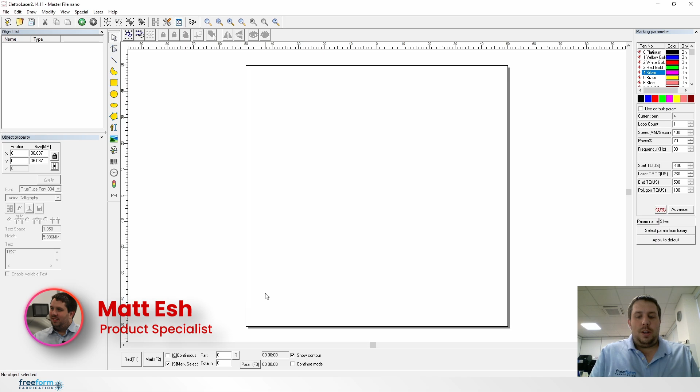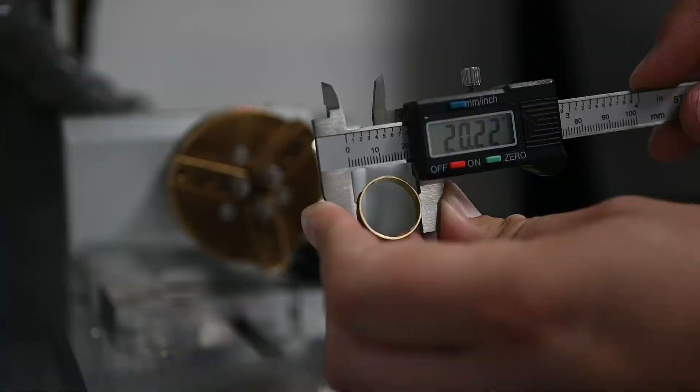Here to do another laser engraving tutorial, and today we're going to engrave some text on this ring. So the first step is to measure the ring. So to start, we're going to do the outside of this ring. So we get that measurement, 20.22 in this case. Once we've got that measurement, we can then measure the width of the band as well. It's 4.77.

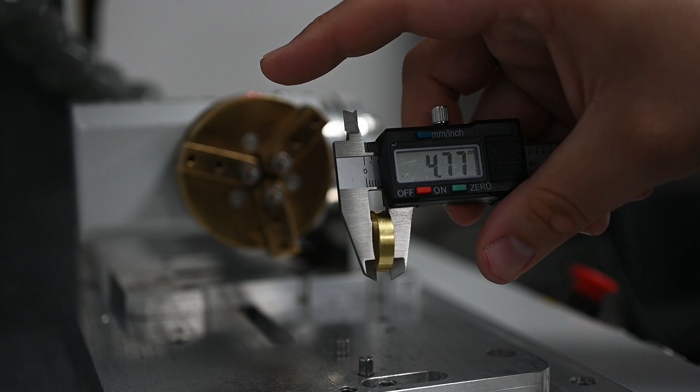So once we've done that, we can go into the laser and ring text mark menu. So the first thing, you'll see a few settings. There's not many you need to worry about. The main ones are ring inside, ring diameter and ring height. The length will not change anything at all. The angle won't change anything. You can leave all of these parts as they are, other than the ring diameter, ring height and ring inside.

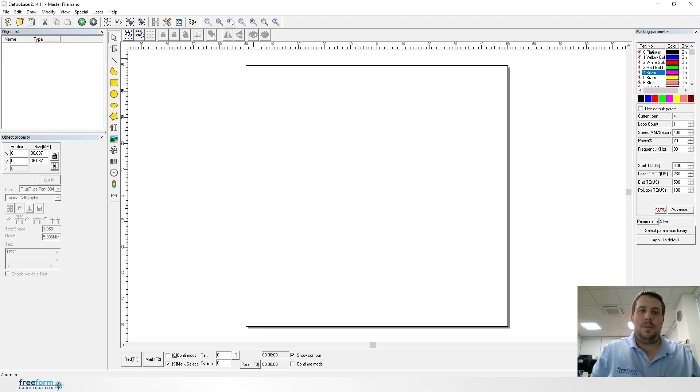So firstly, we're starting with the outside. So we untick that because we don't want it to rotate as if it's the inside. We click on ring diameter, and that's where we put in the diameter, 20.22, and the ring height was 4.77. So once we've done that, we quit out of this menu, and if you zoom in and out on your mouse or use this icon, you can see the box changes, and that now matches the outside of the ring we're engraving on.

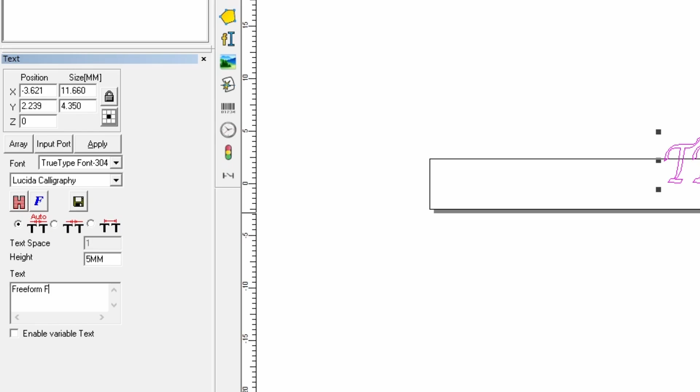So once we've done that, we can then format our text really easily to fit this ring. Just in the bottom left here, you can see where to type in. You can choose your font and everything, as in the video that we've done on text. So let's type in Freeform Fabrication. And now we can see, once we've pressed C to center it in the workspace, it's a bit too big for the ring that we're working on.

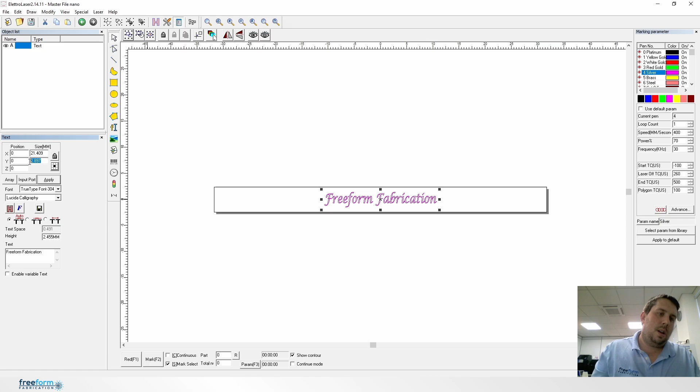So that's when we'll just drag and drop. Of course, you can measure it. We could drag and drop to the right size like this, or if you know the size that you want the engraving to be, you can change the size on here. I personally prefer just to drag and drop and make it the size I'm looking for. So once we've done that, we can hatch it.

So the settings can be the same as any other type of engraving. It doesn't need to be really any deeper unless you're going to really heavily polish it. But that is all covered in the hatching video. Just make sure that hatch 1 and hatch 2 match, so that the cleaning cycle is perfectly following the engraving passes. So again, once we've done that, we've hatched it.

Now we go back into that menu we were in before, the laser and then ring text mark, and just double check those settings again. Ring inside isn't selected, ring diameter is 20.22, ring height is 4.77. That's exactly as it was before. Now we can load this ring on the rotary device.

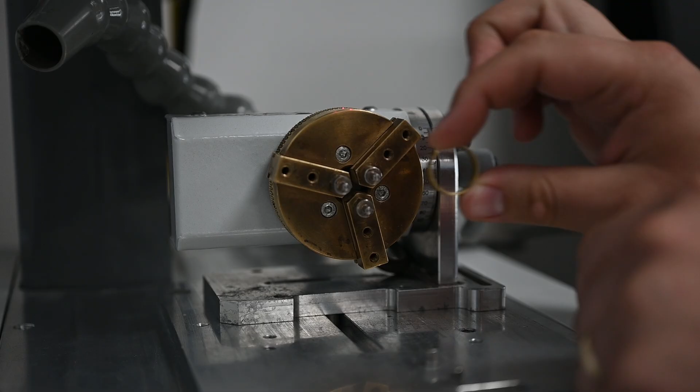So to do the outside of the ring, we put the pins on the inside and then bring those out until it's tight. It doesn't need to be really tight. We don't want to make this slip by doing it so tight, but just tight enough that the ring's not going to move at all.

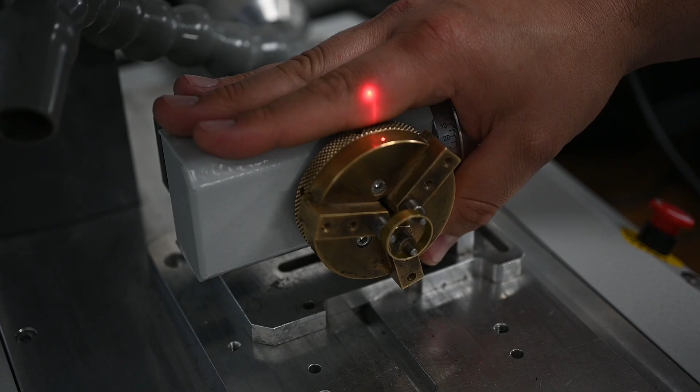Now we want to get the laser in focus on the top of this ring. So you can see the two dots here. We just want to move the rotary back until one of those dots is on the ring. Once we've done that, we can adjust that focus. It's perfect anyway, but we'll take it out, and you see the two dots. We want them to be perfectly over the top of each other. So that's when we adjust that focus until it's spot on.

If you've been engraving a flat object, you might have to adjust it quite a lot. If you've been engraving the inside of a ring, you'll have to adjust it again. Every ring is slightly different, so it's always worth just coming in, checking the focus, moving it out and moving it back in, just to 100% make sure it's in the right place.

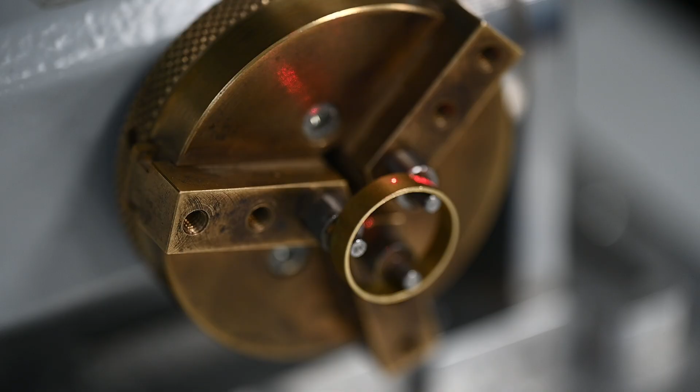So once you've got the ring in focus and you've got the ring on the rotary device, you can now preview, and you do that using this red F1. You need to do that within the ring text mark menu. If you do it outside of the ring text mark menu, you'll get a block. It'll try and engrave it as a flat object. So that's why you really need to make sure you're doing it within the ring text mark menu.

So when you preview within this, you can preview each letter individually. So you get your first letter on there, and that's when you can just make sure that the font is in the right place. So make sure that that F is bang in the center of that ring. In this case, an F anyway, of course. Then you can preview each letter individually. Obviously, freeform fabrication is quite a long thing to engrave, but it's just by doing that you can make sure it's staying in the center of the engraving the whole way around.

Once you've done that and you're happy with the position, you know it's all good, that's when you can press mark and you're good to go. So again, double check the focus. You can move the pipe as close as you can. You're not going to collect loads of dust using the vacuum pipe on a ring engraving, but you will get the fumes at least. So when it engraves, it'll do one letter at a time. It'll engrave the whole depth on each letter as you go.

So now, once you've done that engraving, you can test to see if it's deep enough. So just have a feel. Might be hot. Rings will always be hotter than flat objects. Just go, that's not really deep enough. If you start it again, it'll engrave in exactly the same place with the same amount of passes. Just keep going and doing that until you feel it's deep enough for you.

When you're first starting out, just do less passes, and then you'll get a feeling for how deep you want it to be. So just do 2 passes at a time, say, and then you'll get a rough idea of how many passes you want to do. Especially after you've polished it, you'll see how deep it is. So we've engraved the outside of this ring. It's looking great. It's nice and deep. We're really happy with it.

What we can now do is engrave the inside of the ring. So we can measure the inside here. So we're going to engrave the inside of the same ring, but we do need to measure the inside diameter. So that's when we're looking at about 19 mil, bang on. And the width of the band or the ring height will be the same. The important thing is to remember to check the ring inside box. Otherwise your engraving will go the wrong way around the inside of the ring.

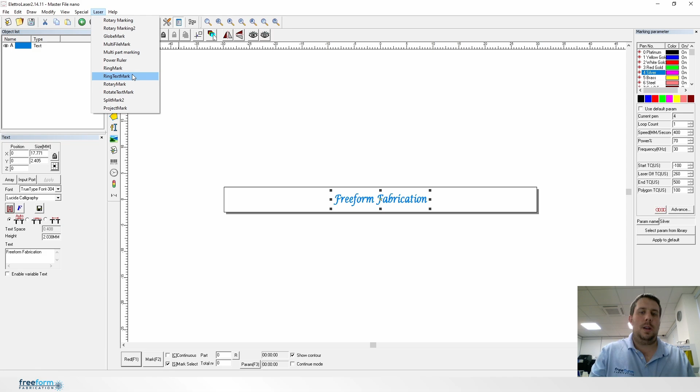So again, we can come out of this menu, just make sure that that's not going to be too big for the inside of this ring. We can reduce it a touch. Remember, when you change the size of something that's already hatched, always remember to press apply, just to reset that hatch. Now we go back into this menu.

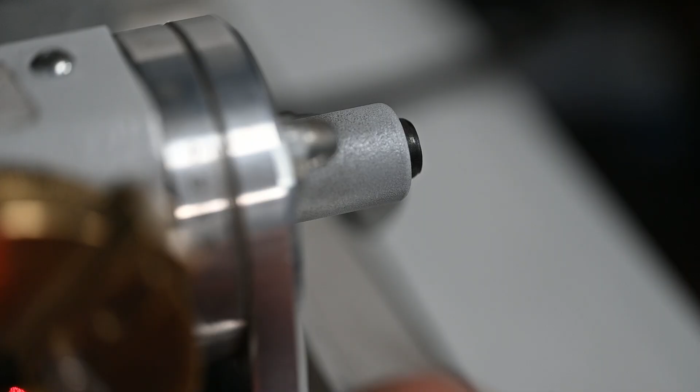So to do an inside ring engraving, we need to have the pins on the outside of the ring. And I'm trying to hold it, and just move those down. Make sure it's nice and flat against the back of the pins there. And again, make sure it's tight enough without being too tight. Then we just need to lift this handle to loosen the rotary, and then tilt that back until you get to 20 degrees, which is the ideal angle that you want to use.

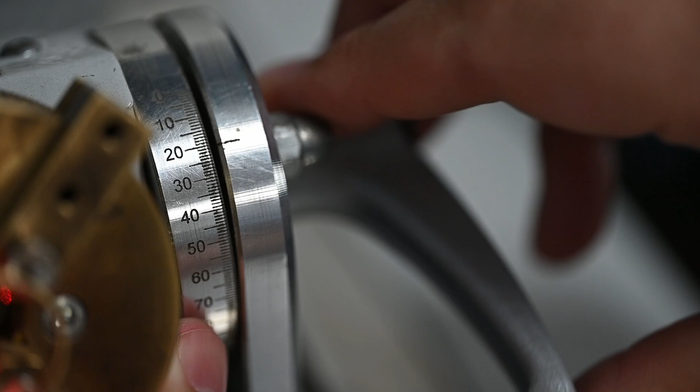You can feel it on the rotary, like there's grips on each number, and just tighten that so it stays on 20 degrees. And again, making sure that 2 dots are perfectly overlapped. So you can see there, 1 dot, just move it a bit further away and come in, and just make sure that those 2 dots are overlapping perfectly.

So the next point again is to preview. So we use the red. Again, don't use the outside menu, don't use these ones here. We need to use the ring text mark menu when you preview. And you press red on here.

And again, just make sure that that is nice and central. If you find that the ring is a really fine shank, or you've got a large setting, so then you can't see the whole of the F or the whole of your first letter when you're going to engrave it, that's when you can try using a bigger angle or a smaller angle depending on what works. If you can preview it fully, then you can do the whole engraving. But if you can't, then you need to adjust the angle to 25, maybe even 30 degrees.

But just when you do that, just consider it's going to be quite a steep angle on the inside of your ring. So if that's too steep, you can keep the engraving nice and thin, ideally, to keep it to the center of the ring so it's not going to go too far out of focus if you're having to use a bigger angle.

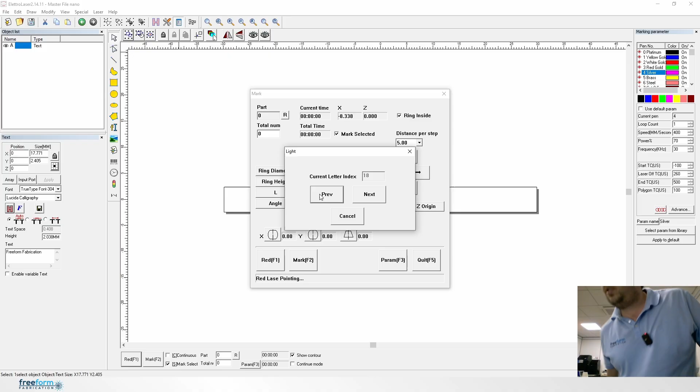If you're looking to do this, what I tend to do is preview the first letter and paint that in black marker. Then what I'll do is move that preview by pressing previous, and do the last letter. Then I can paint the whole inside of that ring with the marker pen. So now you've got the whole of that inside of the ring with the marker pen.

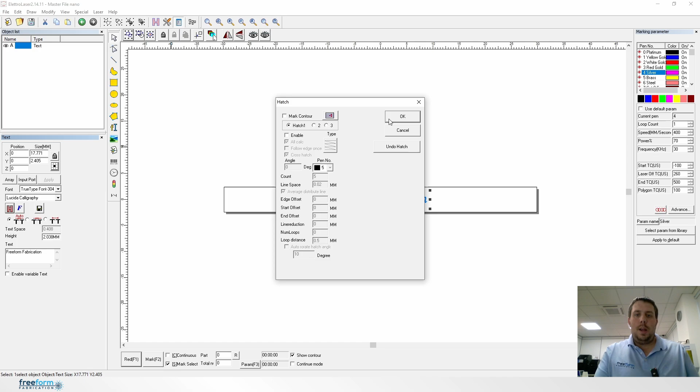What we can do is come out of this menu and go into the hatch. And what we want to do is disable hatch 1 by unticking enable, and you'll see everything goes grey. Once you've done that, you'll see you've only got the cleaning cycle activated. And what that's going to do is burn off the marker pen and leave a little silhouette or hologram or whatever you want to call it of your engraving on the inside of that ring, which will allow you to physically check that we're in the right place. So I'm going to do that first.

Also, by previewing on the inside of the ring, you can also make sure you're not going to go over the hallmark. So you can just physically move the ring to avoid the hallmark. So by previewing the first letter, move the ring, and have it starting next to the hallmark or away from the hallmark, and just make sure that when you do each letter, it's not going to go over the hallmark.

So we can now engrave this, and it's just going to be really quick and burn off that marker pen, which will leave behind a nice silhouette for me to check. You can turn off the lights on the side of the nano, on the 1 and 2, and just check that we're in the right place. I think that looks pretty good to me.

So now what I need to do is go to the quit menu again, go back into the hatch, re-enable hatch 1, then go back into the menu, into the laser and then ring text mark menu, and then it's going to engrave in exactly the same place as that silhouette.

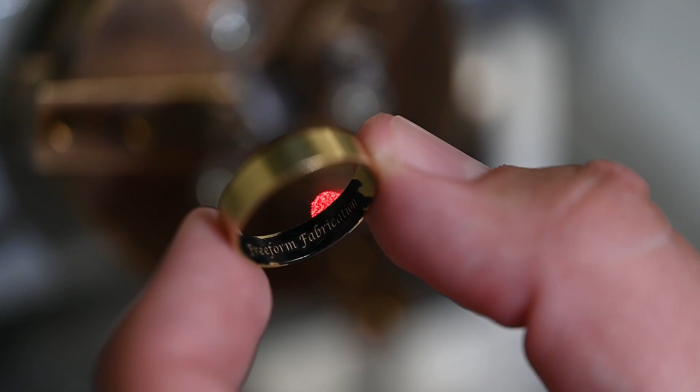So have a look, check the depth, check you're happy with it. Obviously bear in mind it might be quite warm. And there it is. And that is engraving the inside and the outside of a ring.